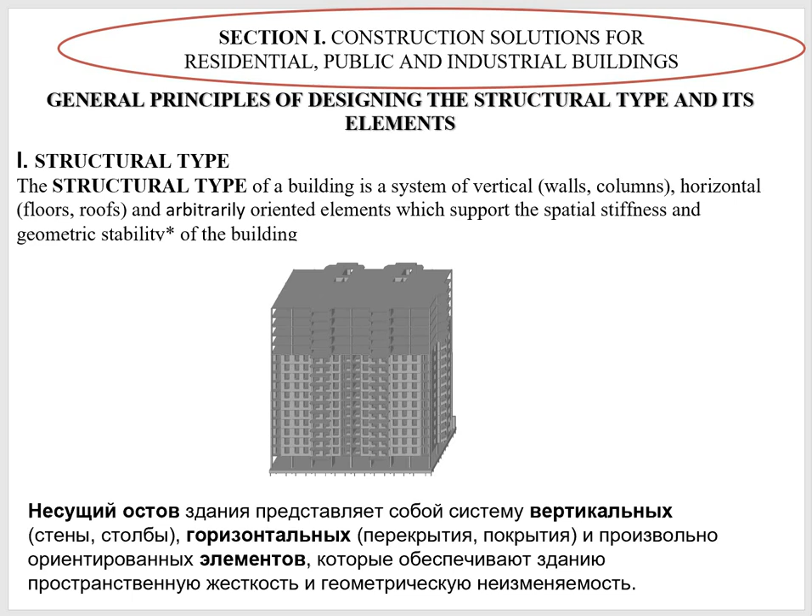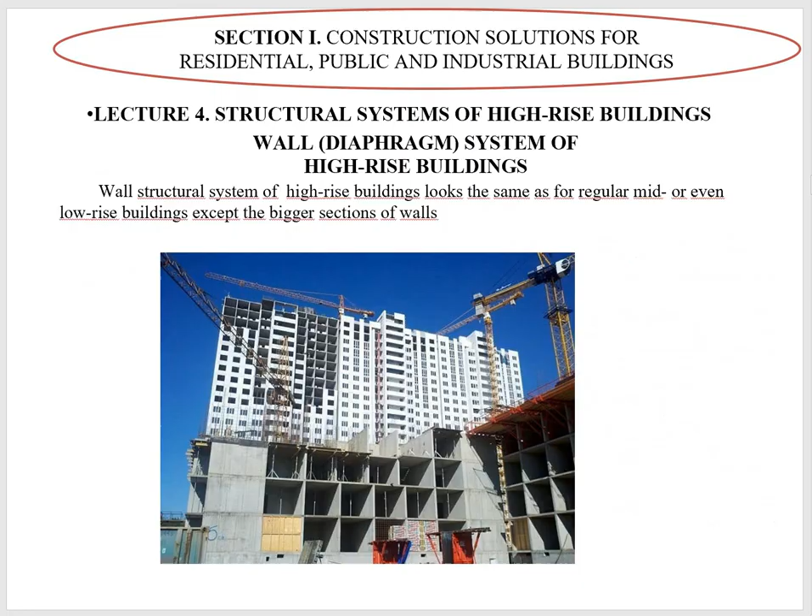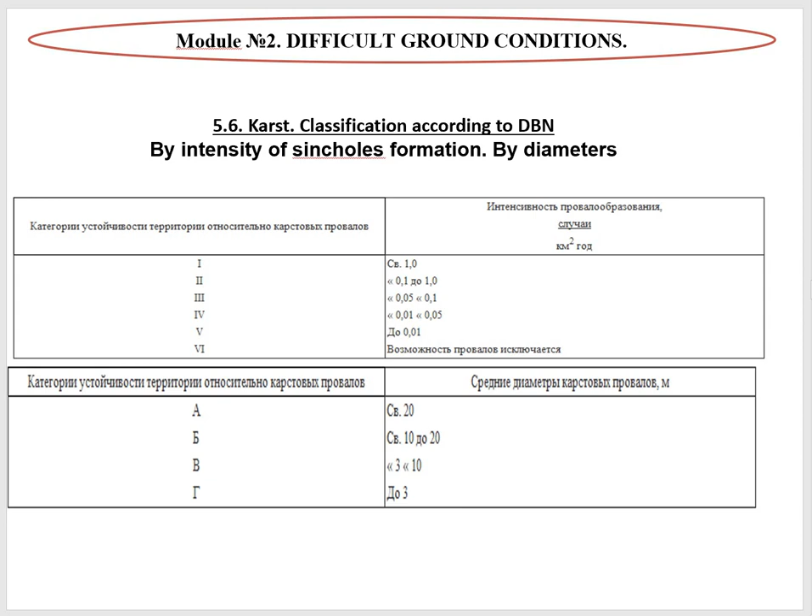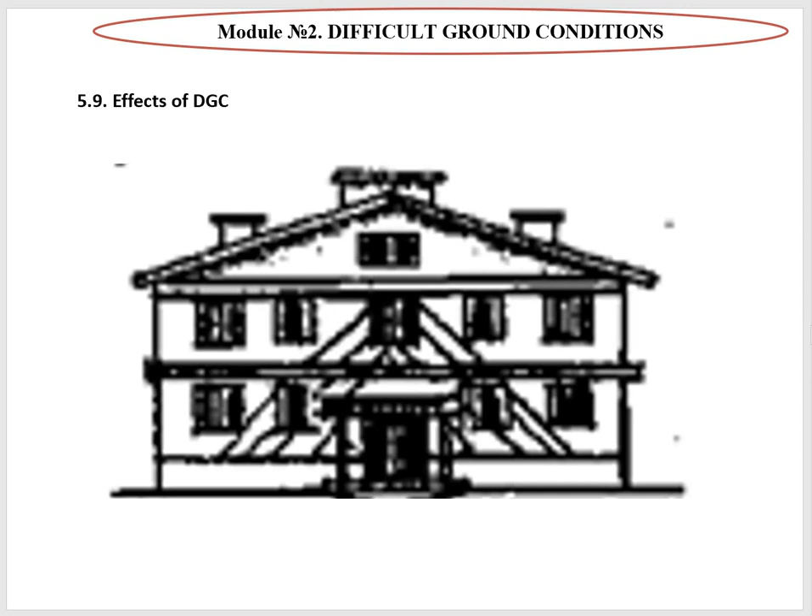We have already considered difficult ground conditions connected with water flooding, surface water flooding, with karst, erosion, abrasion, landslides, and today we will start to talk about sites exposed to seismic impacts.

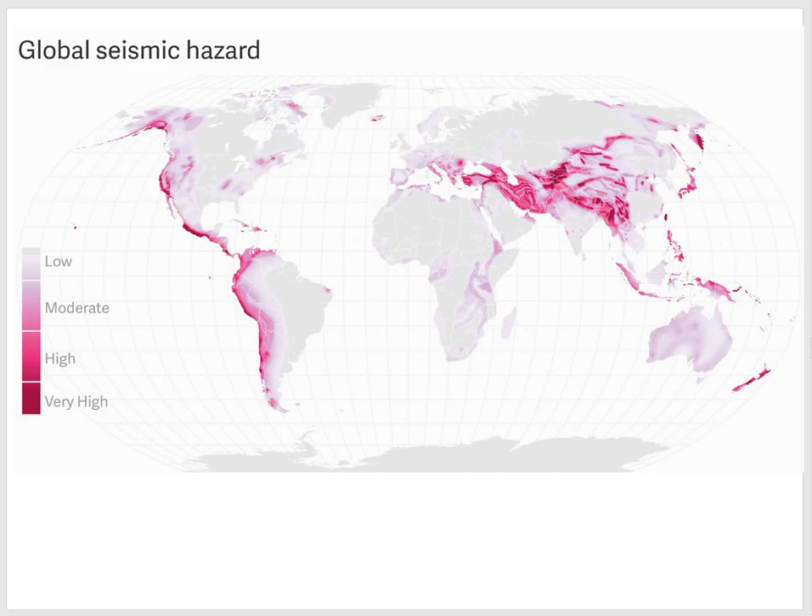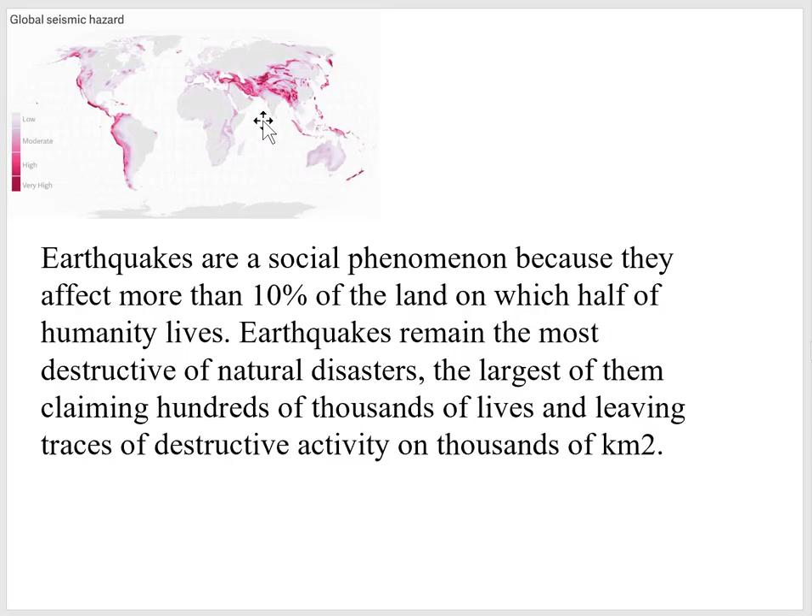This lecture will consist of two parts: seismology and earthquake engineering. First we'll talk about global seismic hazard. It's interesting to know that more than 10% of the Earth's surface is affected by seismic impacts, and half of human beings live on that 10%.

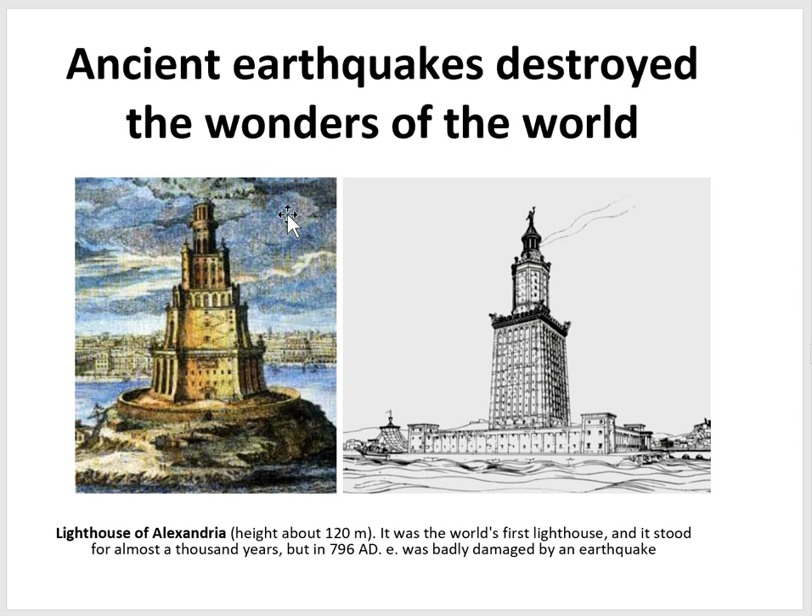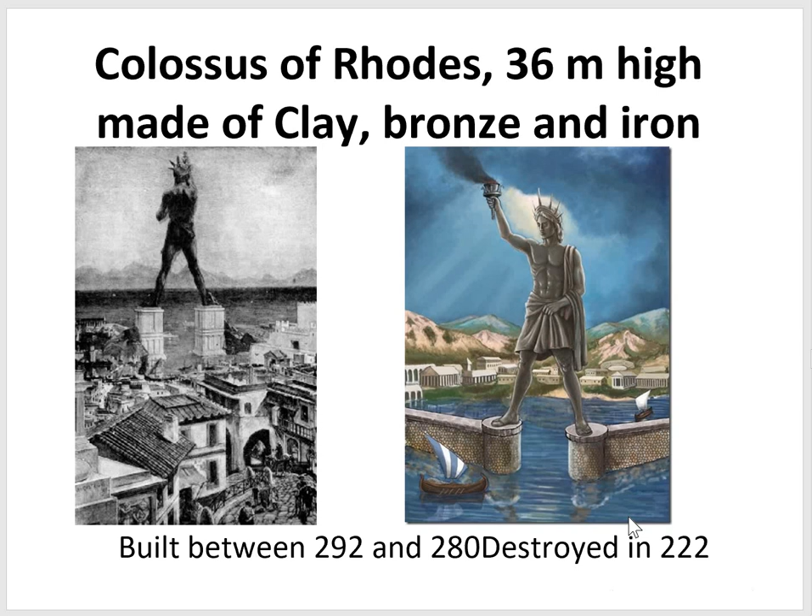If we analyze the history of humans, we find that earthquakes were always near humans, and the wonders of the world show this better than anything else. From the seven wonders of the world, three were destroyed by earthquakes: the lighthouse in Alexandria, the mausoleum in Halicarnassus, and also the Colossus of Rhodes, which were destroyed by earthquake in 222 before Christ.

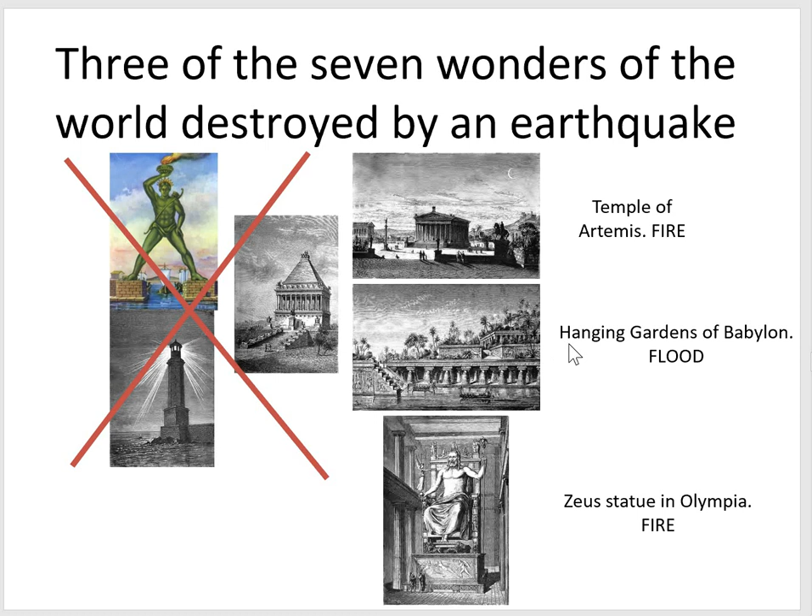The rest of the wonders of the world were destroyed by fires and flood. Only one wonder of the world still stands: the pyramid of Cheops. It was built 2540 before Christ and stands still now because of its unique form, and because of the ratio between the distribution of the mass of the structure and the form of the building, since the form and this distribution of mass are in the best ratio to each other.

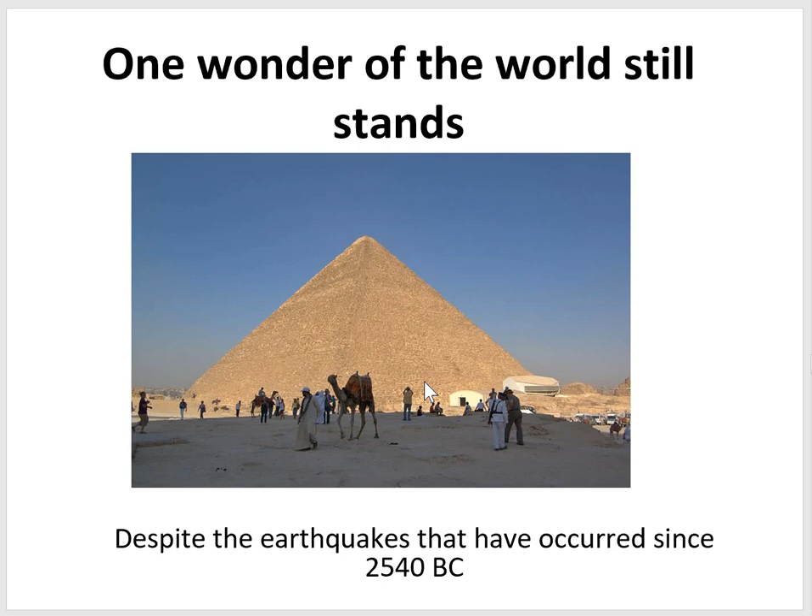We also have to know that our region, Ukraine, is also exposed to earthquakes. We know of more than 30 significant earthquakes on our territory. We don't know much about the ancient earthquakes, but we know very well about the earthquakes which took place in the last hundreds of years, such as the Crimea earthquakes and the Odessa earthquakes in 1802 and 1940.

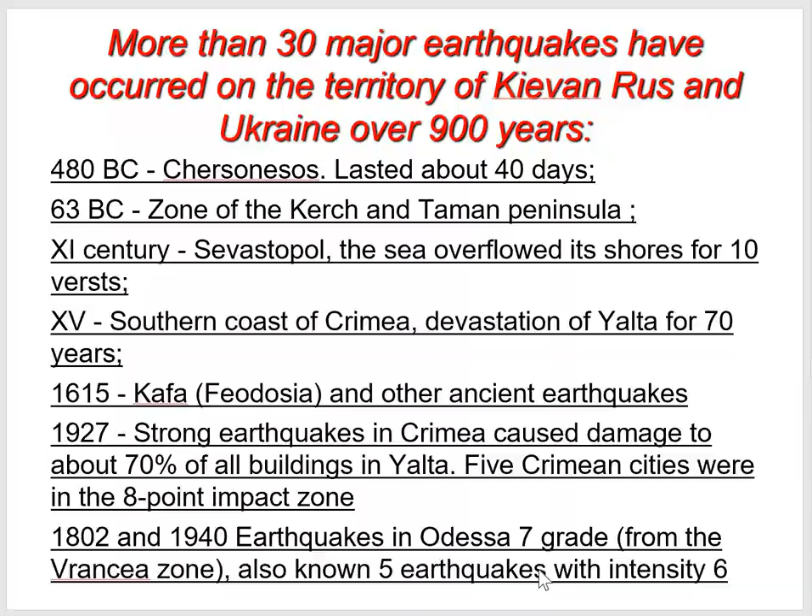The Odessa earthquakes had an intensity of 7 grade, and we also know many of 5 and 6 grade intensity. Here is the diagram of the Odessa earthquakes, and we can see the 7 grade intensity, as well as intensity 6, 5, and 5.5.

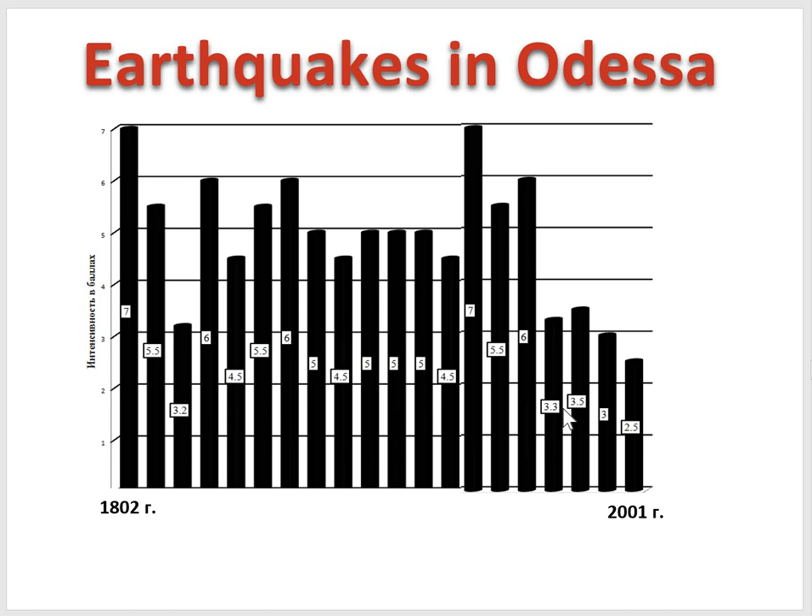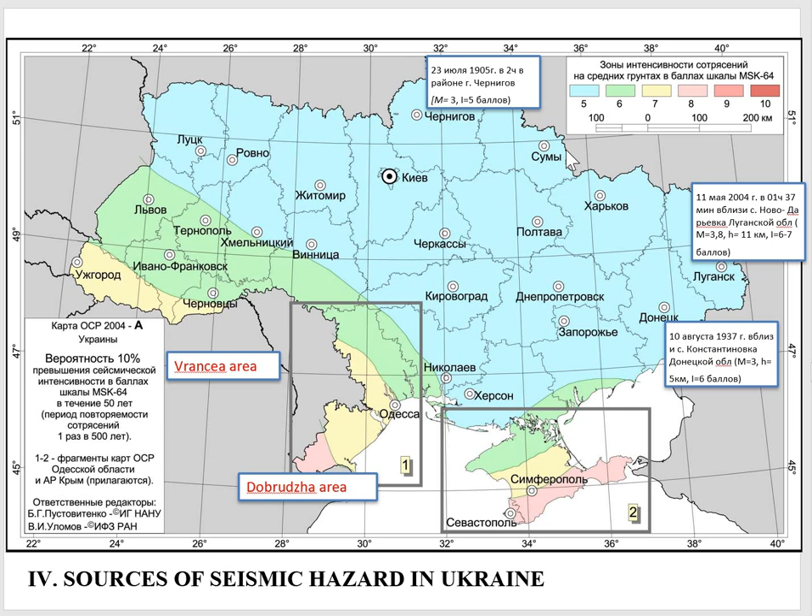We know there are some sources of earthquakes which make the territory of Ukraine, in most part, affected by earthquakes. We know the Vrancea area and Dobrudzha area, both located in Romania. We also know the Crimea earthquakes, Carpathian earthquakes, and platform earthquakes of the territory of the country.

Here we can see the map of peak ground acceleration, and most of them are situated in Romania, but we can also see the Crimea earthquakes and the peaks of these earthquakes.

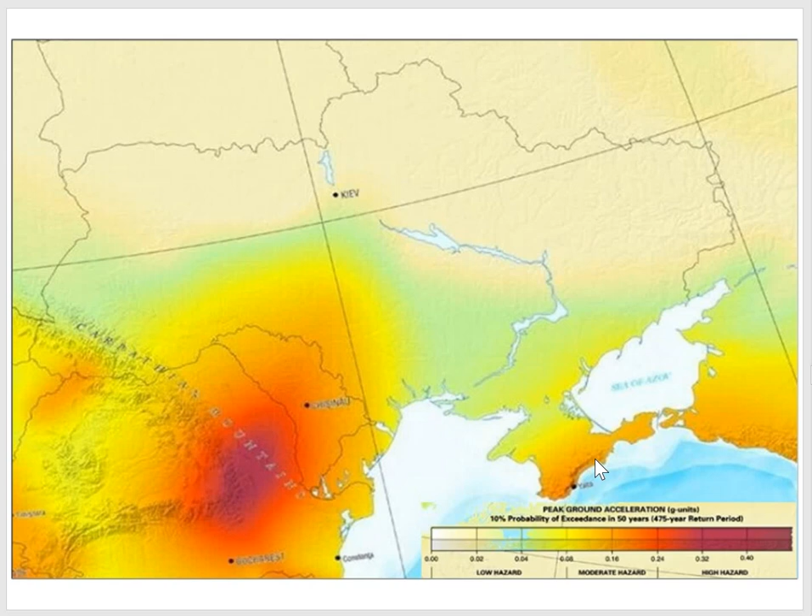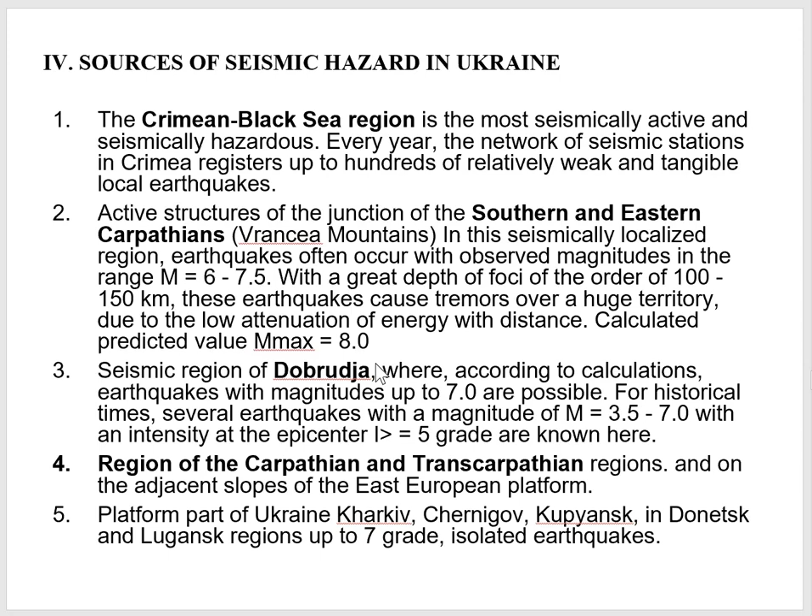Here are the 5 main sources of seismic hazard in Ukraine. We were talking about it previously.

Now it's time for us to analyze the causes of buildings destroyed by earthquakes. Why are they destroyed? It's because of design errors, which are errors formed by designers, architects, and structural engineers. It's construction errors, which occur during the construction of the building. Operating errors, which occur during the exploitation of the building, and errors in regulatory documents. We also know that our building codes have problems and mistakes, and those can lead to the demolition of buildings due to earthquakes.

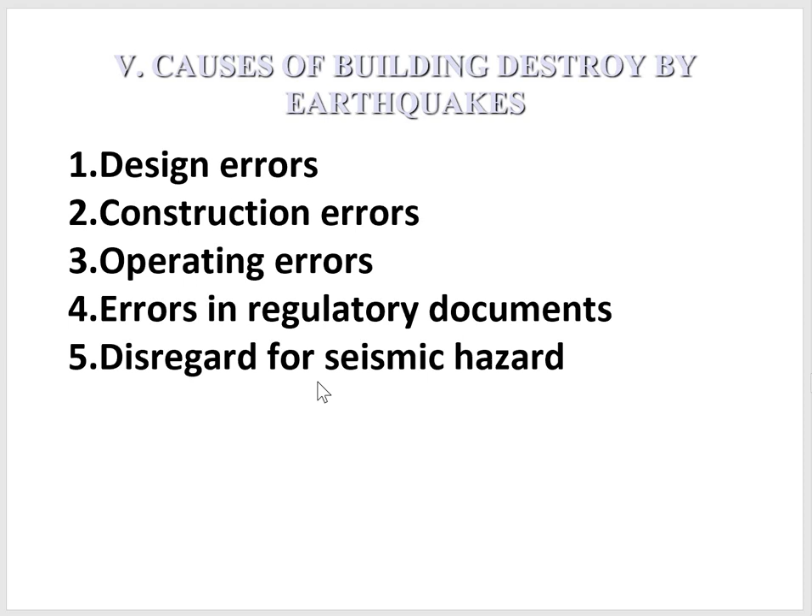Also, disregard for seismic hazard is a very common cause of building destruction, because some people don't want to consider earthquake probability at the construction site.

One can classify causes of earthquakes. Mostly it's tectonic, a joint behavior of various platforms and seismic plates, but also volcanic, landslide earthquakes, and technogenic earthquakes.

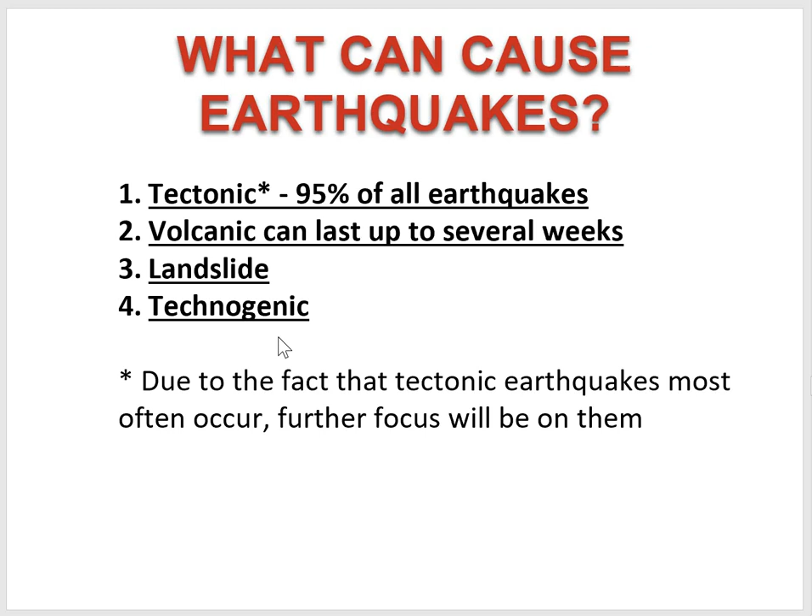We have to consider the most dangerous source of seismic hazard, which is connected with tectonics. To analyze the tectonics, we have to analyze the structure of the Earth, our planet. It looks like a layered cake with a hardened outer layer and softer liquid interior layers, called the core, inner core, outer core, bottom mantle, top mantle, and also various surfaces between such layers.

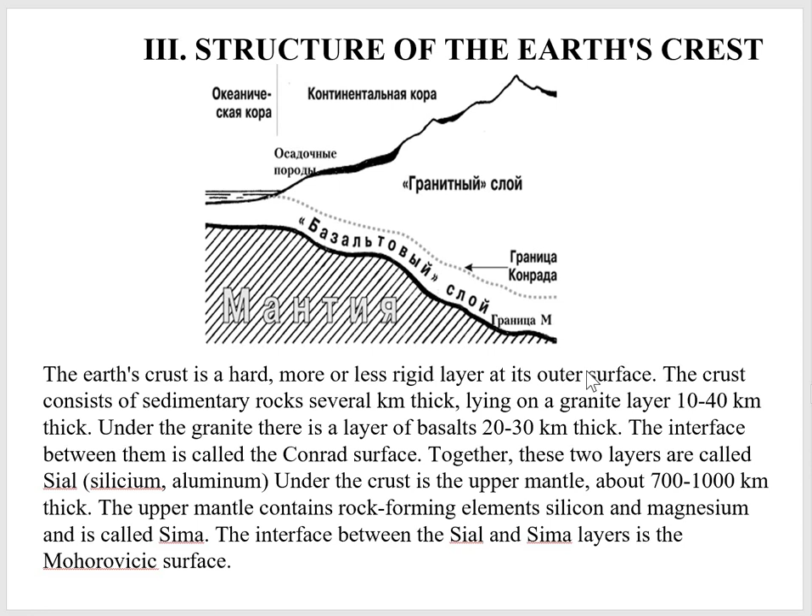Here is the picture of our Earth's crust, and it looks like this. It's also lying on the outer mantle or top mantle, and these parts of the Earth's crust move in various directions, which leads to accumulation of seismic energy and its redistribution due to earthquakes, when a really big amount of energy is collected in the cracks of the Earth's crust.

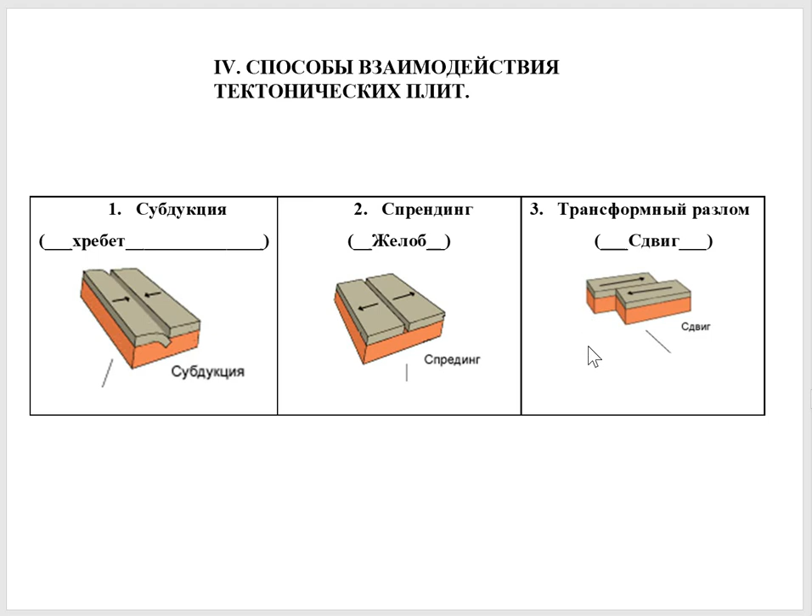Here we can see the methods of interaction of tectonic plates: subduction, spreading, and shift.

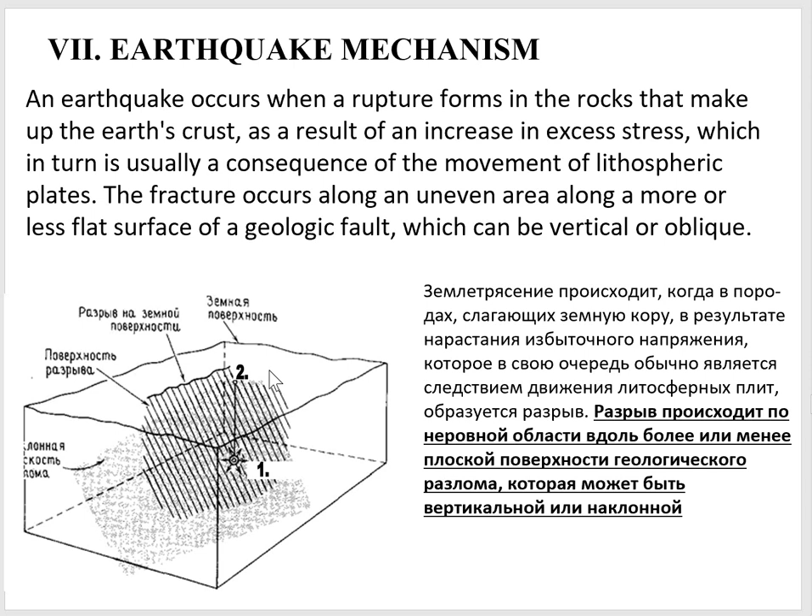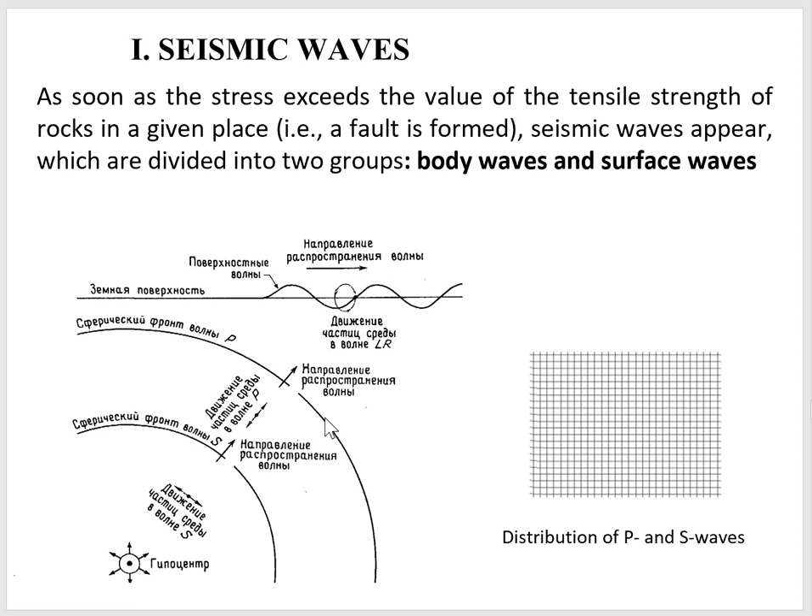During the earthquake, we deal with 4 waves, which can be divided into main groups. Here we can see the situation which shows us 2 main waves, the P wave and S wave. The S wave is the secondary wave, and we can see it right here. And here we can see the primary wave. It looks like this, and secondary waves move in this direction. We have to know that the P wave is the fastest wave, because P is from primary, первичная, and S is a slower seismic wave, and it's called the S wave because it is secondary.

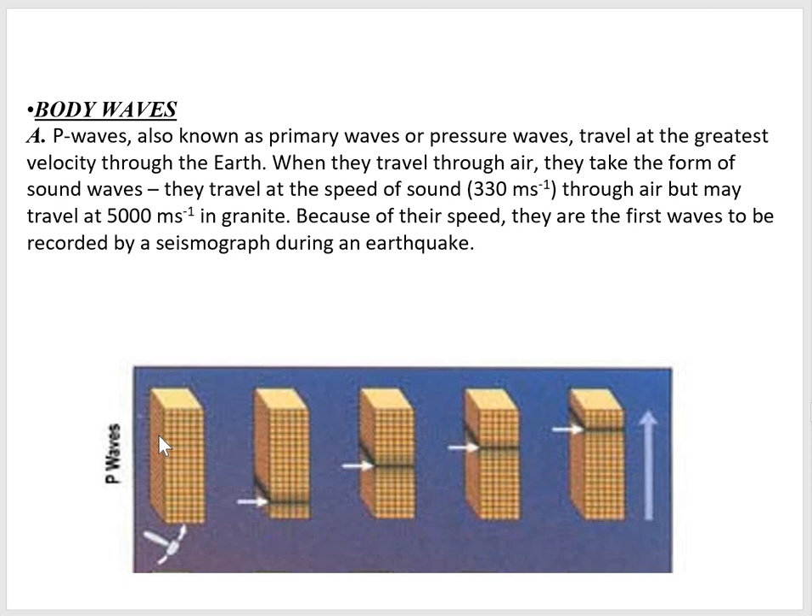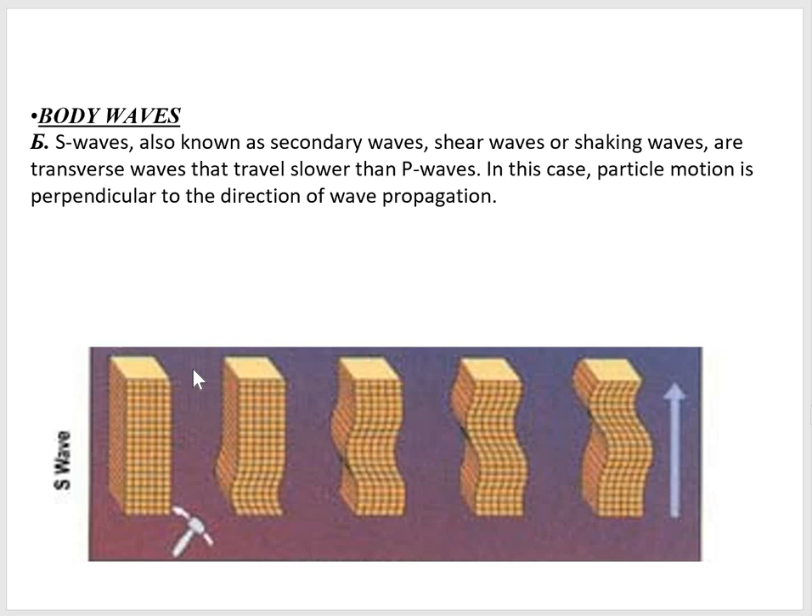And here we can see the transmission of waves in simple prisms. It is the motion of the prism from the impact of the hammer, and it shows us the movement of the particles according to the P wave. When we look at the S wave, it is the lateral impact on our prism, and it also shows us the movement of the wave through this prism.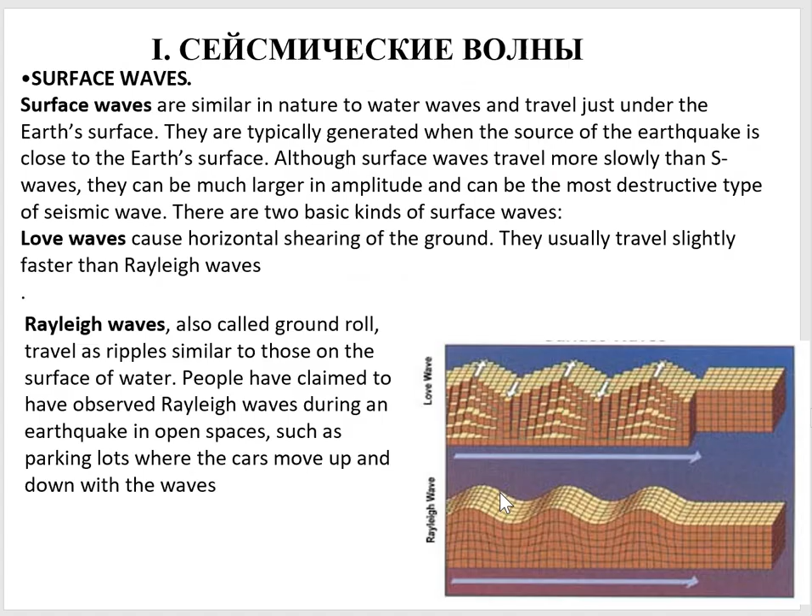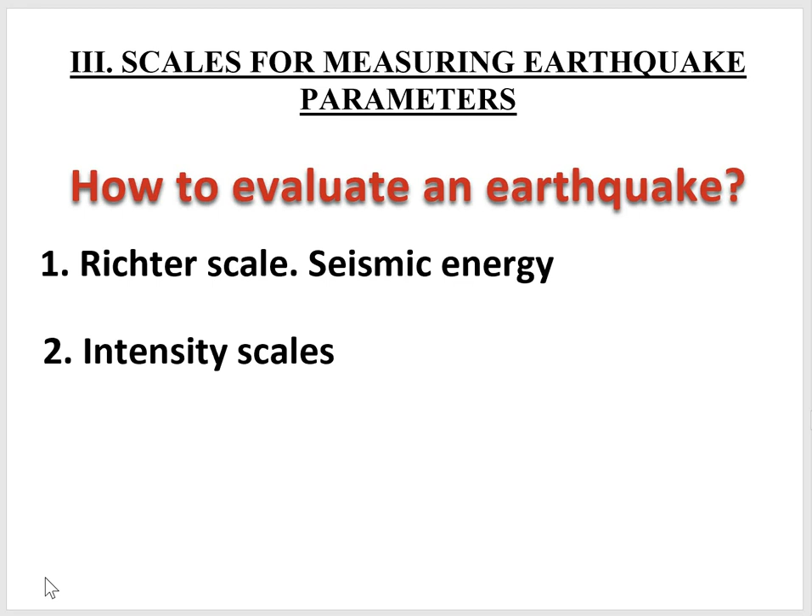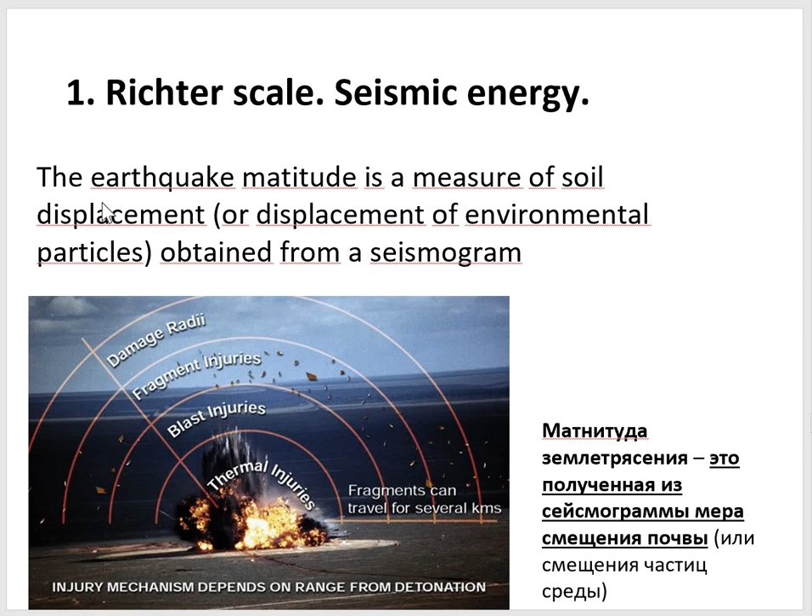The next question that we have to discuss today is how to evaluate the earthquake. It is a very important topic because we have some dimensions for our bodies, like weight and height, but earthquakes can be evaluated in 2 main ways: by the Richter scale and the intensity scale. The Richter scale shows us the energy of the earthquake as if it were a blast or explosion, and it shows us the TNT equivalent of the earthquake, like C4 or other explosive material. An earthquake can also be evaluated in the Trotyl equivalent of the blast.

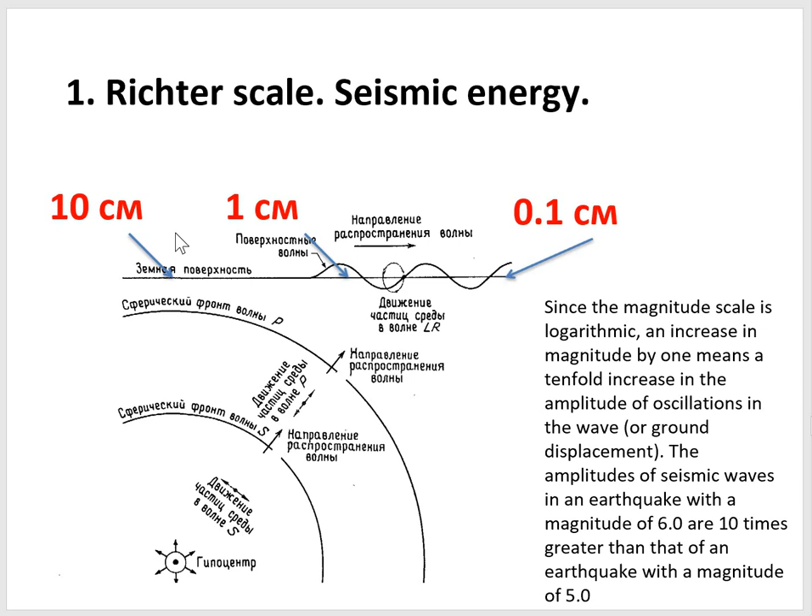Next, how can it be measured? It's measured as the ratio of two important values. First is the displacement of the Earth's surface, and the ratio of this displacement to the distance to the hypocenter gives us the magnitude. The Richter scale is measured in magnitude. So length is measured in meters and centimeters, also in feet, but when we talk about the Richter scale, it is measured in magnitudes.

Also, we have another group of scales. They are called intensity scales, and intensity is the visual assessment of the result of the earthquake. So according to the amount of destroyed constructions, cracks, etc., we can make a conclusion about the grades according to the intensity scale. So the intensity scale is an absolutely visual and subjective scale, which is measured according to the visual assessment of the consequences of the earthquakes.

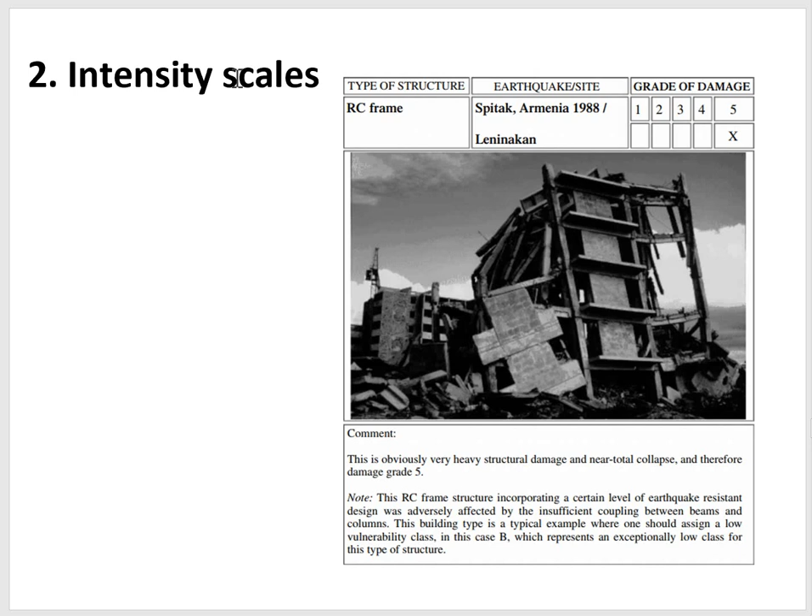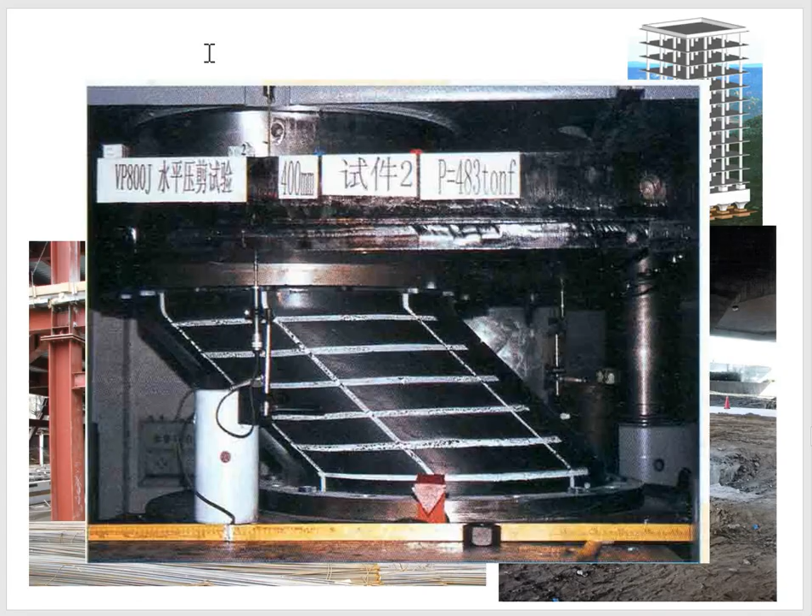Main definitions of the intensity scale are according to our Ukrainian DBN. We have our own scale, but it's very similar to the European macroseismic scale. And we have a ratio between those two scales that we were talking about previously, because each earthquake has only one magnitude, but it has a very large number of intensities. Why is that so? When we talk about magnitude, it is the displacement of the surface compared with the distance from the hypocenter.

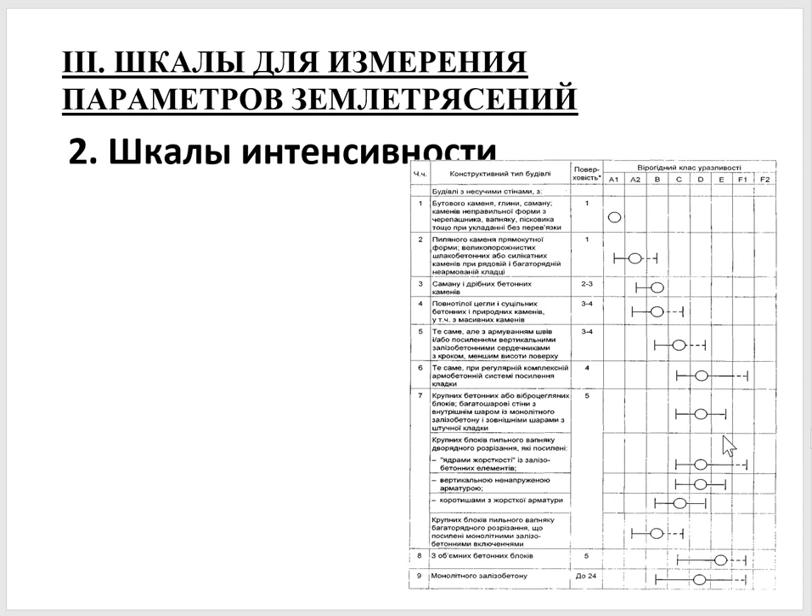But when we talk about intensity, it is the destruction of the structure. So when we deal with an earthquake, here we can see the magnitude, and although we are assessing the displacement from this or that place, it can be expressed in one value called magnitude. But for one magnitude we had in this case 12 intensities, because the closer it is situated to the hypocenter, the bigger the destruction will be.

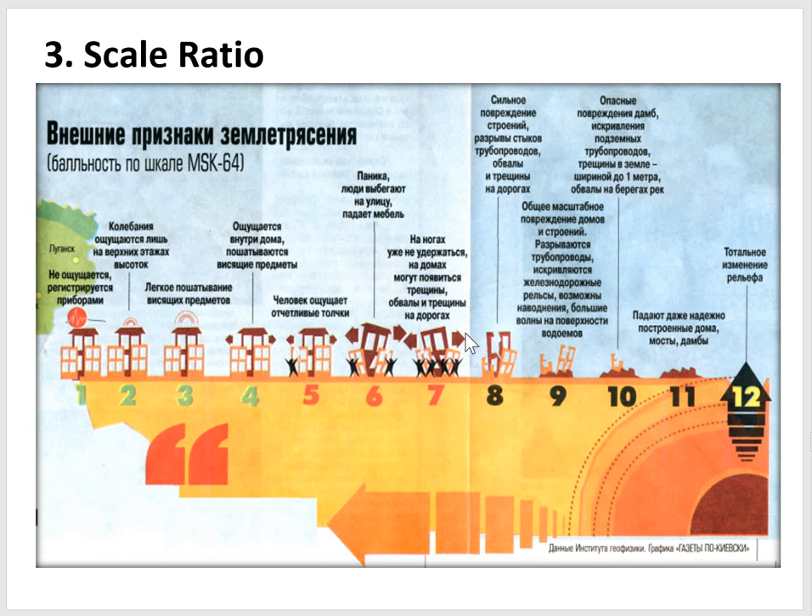But when our building is located very far from the hypocenter, the destruction will be significantly less compared to the building which is situated in the hypocenter, at the epicenter of the earthquake.

So, what do we have to do with earthquakes to reduce the losses due to the earthquakes? First of all, it's preparatory work with the people. So we have to prepare people for the earthquake, so they know what to do when the earthquake starts. Next way is to predict the earthquakes, but as we know, for today it's impossible to predict the earthquake and its localization.

We can make the forecast, but we absolutely have no chance to predict the earthquake and say with 100% probability that the earthquake will be tomorrow or in 100 years. We can tell about the probability of earthquake, but it cannot be measured as a 100% probability.

And also we have our architectural, structural approach to reduce the losses due to the earthquakes. It's earthquake resistant construction and designing. So it is one of the most effective ways to reduce losses, but also it is the most expensive way to reduce the amount of losses due to earthquakes.

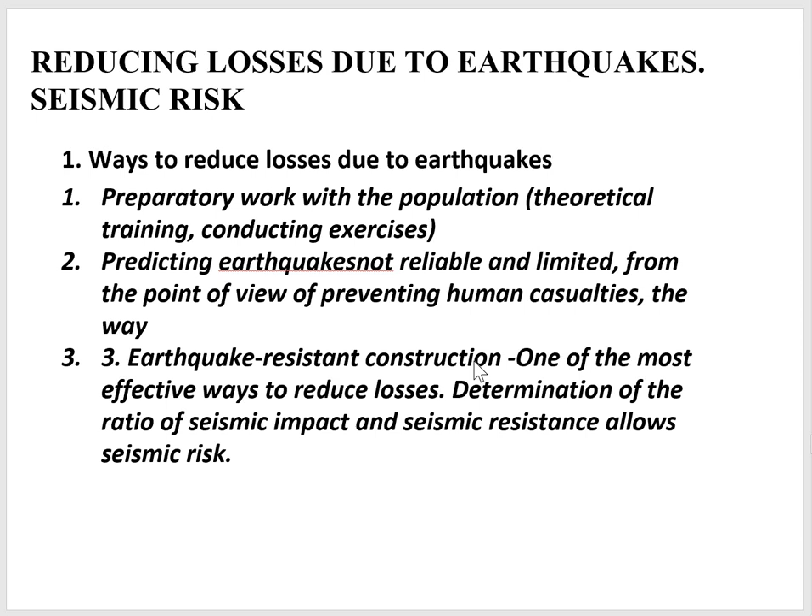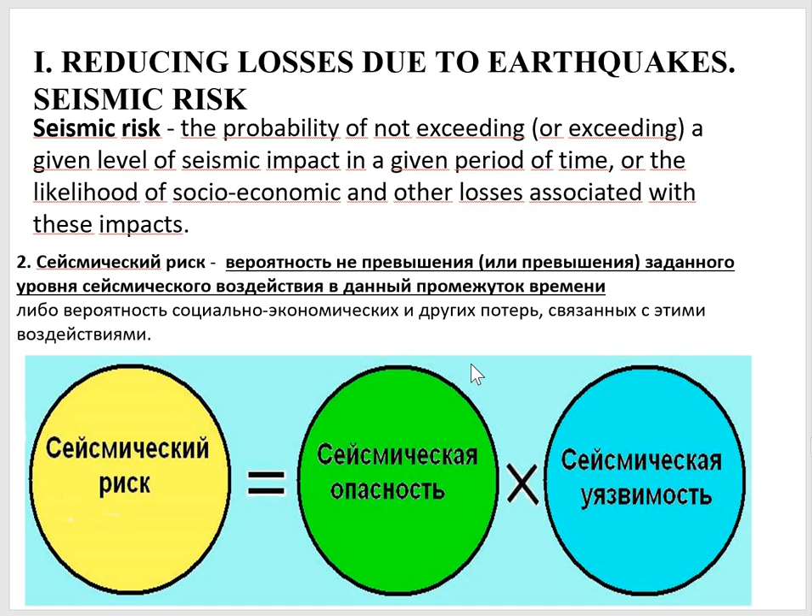Now we're talking about the seismic risk. It is the probability of not exceeding, or the opposite, exceeding a given level of seismic impact in a given period of time, or the likelihood of socioeconomic and other losses associated with the impacts.

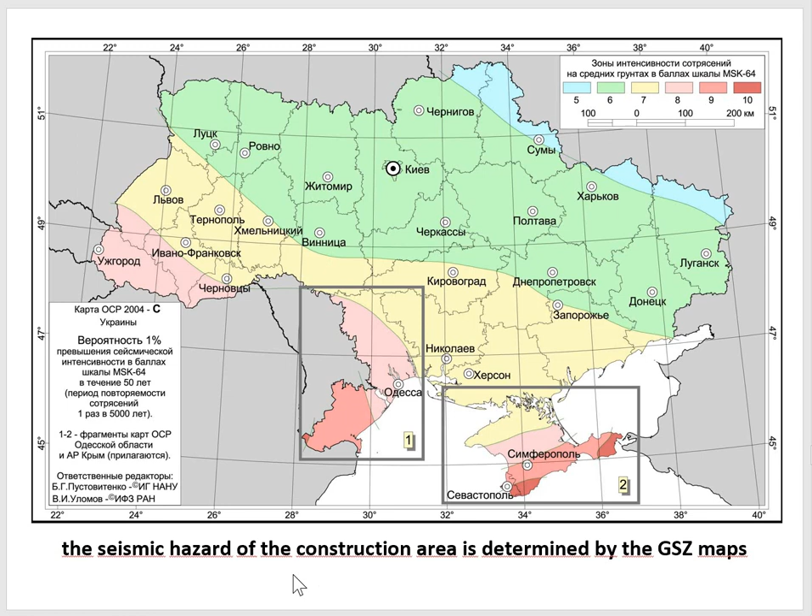So according to those we have 3 maps: A, B, C map, and according to one map we have the intensity of the earthquakes 7, but according to map C it is 8 grade. So with the growth of the maps from A to C, we have the significant growth of the intensity, which we have to understand when we design structural elements for buildings in those regions.

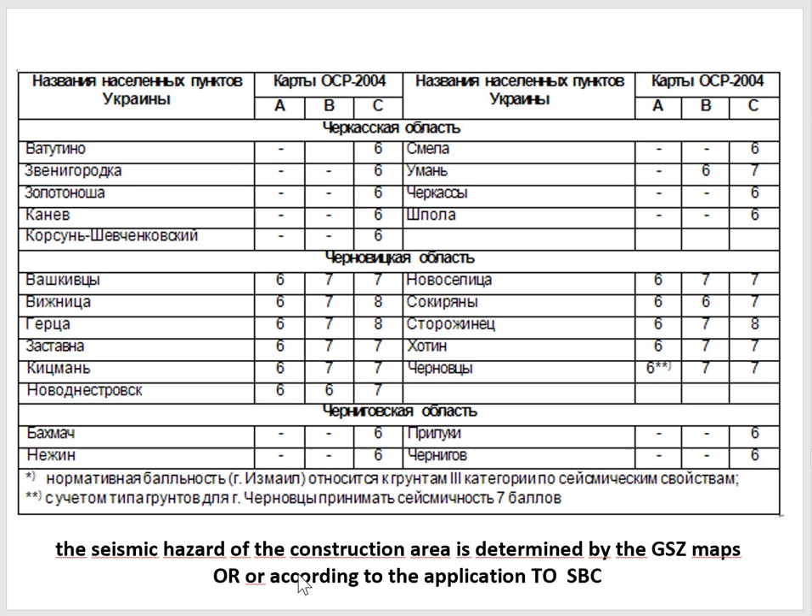So also in the Ukrainian code called DBN, we have such a map which gives us an ability to define which town can be exposed to an earthquake of a certain intensity.

Also, we have the very important impact of the ground, because soils at our structural site can decrease the impact of the earthquake on our building because of their strength. So we have maps for all of Ukraine, and there all the regions are exposed to the intensity which was defined for soils of the second category.

But if we have on our structural site soils of the first category, then we have to reduce the seismic impact. And from the opposite point of view, when we have soils at our structural site from the third category, then we have to multiply the seismic impact to take it bigger, because those soils can increase the impact of an earthquake because of their structure.

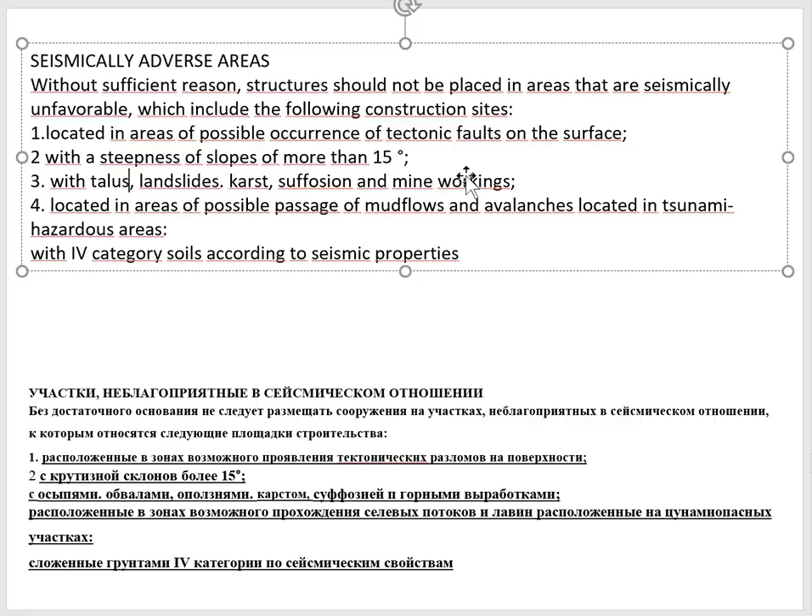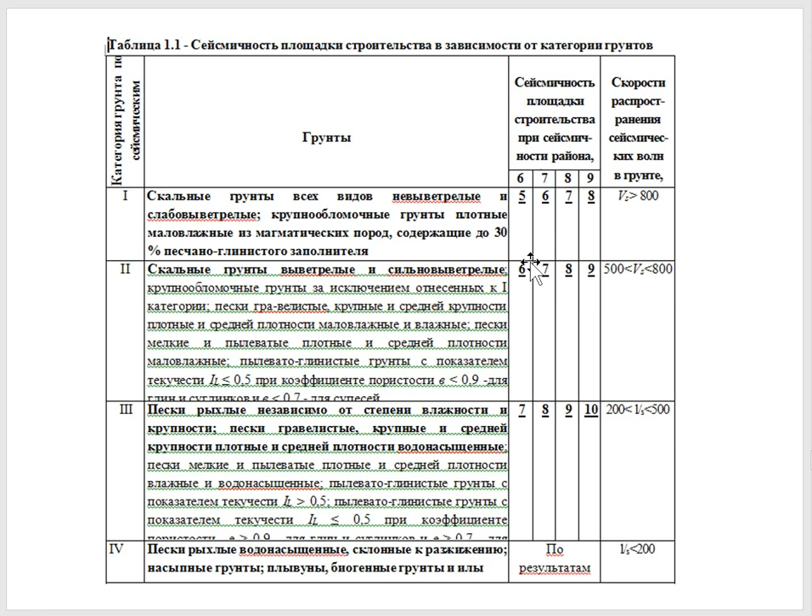And the fourth category of soils: according to the soil seismic properties, as we were talking about previously, the first category is the best category, because it gives a reduction of the seismic impacts, and the third category of soils can, on the opposite side, increase the impacts of the earthquakes and add an extra grade. Say, according to map A, we have 7 grade; then if on this construction site we have soils of the third category, we have to add one more grade and calculate the building on intensity 8. And the fourth category of ground is the worst.

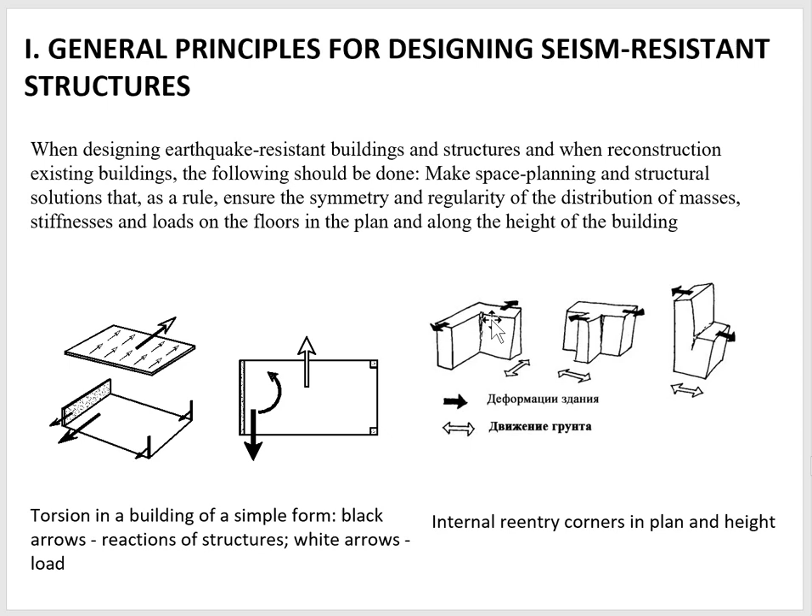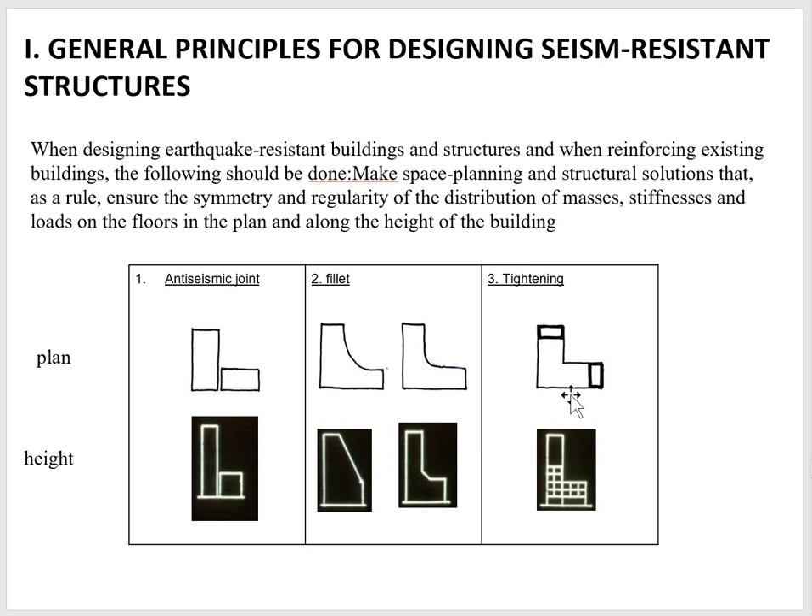With the wall which is situated asymmetrically, it gives us an additional torsional moment which can destroy our building. Also, we have to be careful with the inner corners of the building, because during earthquakes they can absolutely destroy the building. That is why we have some solutions for cases when we deal with such inner corners. First, and the simplest one, is to subdivide the building into parts, and this lets us avoid cracks in the facade walls during possible earthquakes. Also, such a solution makes the behavior of such structures much better.

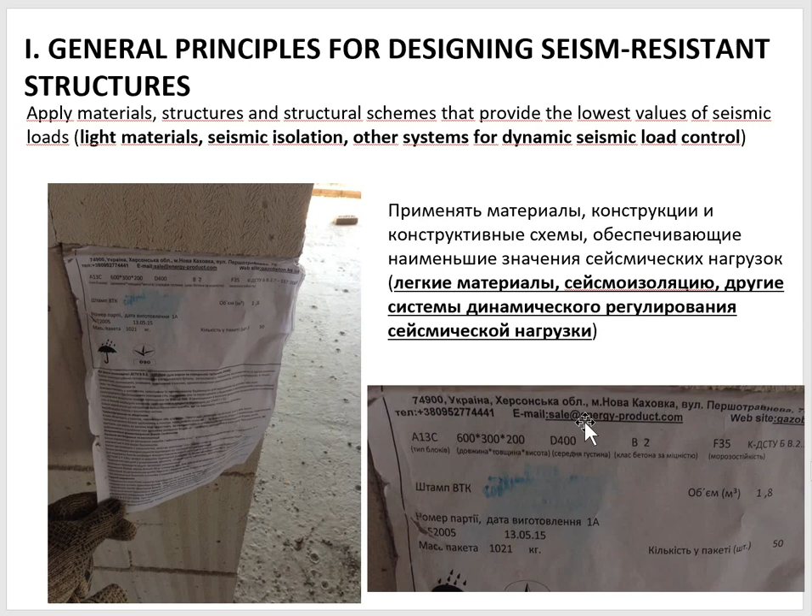Also, we have to understand that when we talk about seismic impact, it is the combination of two main parameters: the mass of the structure and peak ground acceleration. We can do nothing about the second, the ground acceleration, but the first parameter of the seismic force, mass, is absolutely in our hands, and if we take lighter structural elements, it lets us reduce the seismic impact, because as weight decreases, so does the seismic impact on the structure.

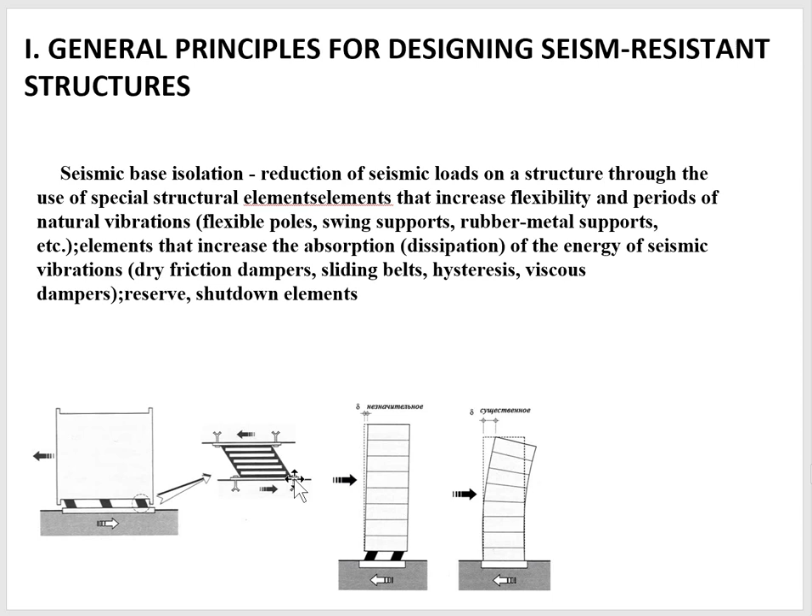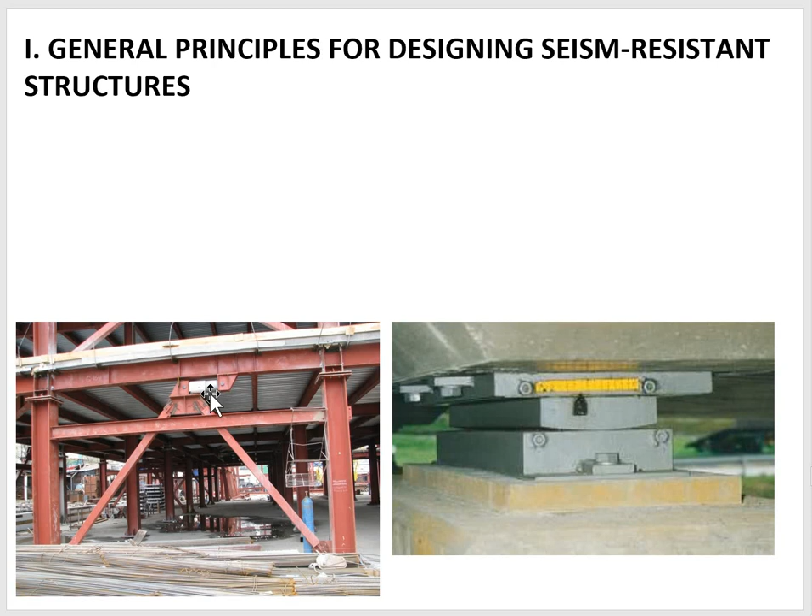So we also have various solutions such as seismic base isolation, which gives us an opportunity to reduce the impact on the building by using rubber-metallic plates, or solutions which decrease the impact of the earthquake on the building through elements which allow it to move in this way.

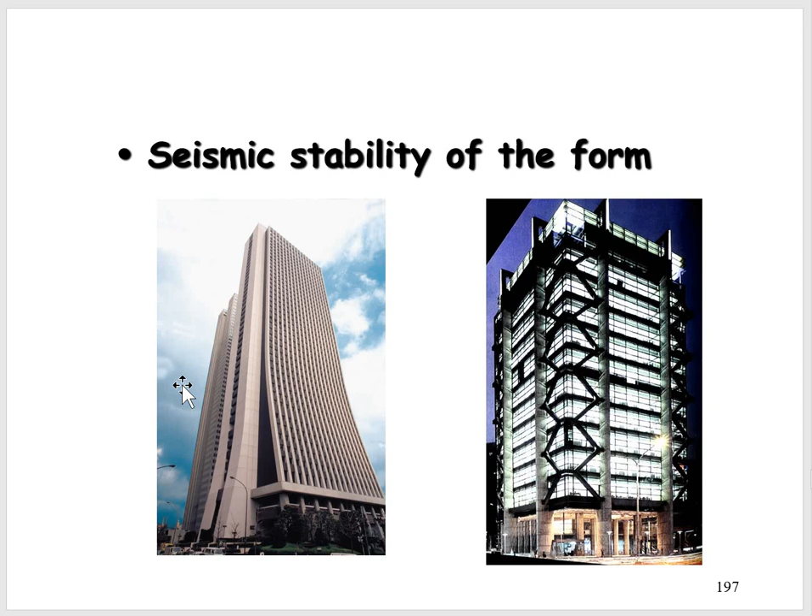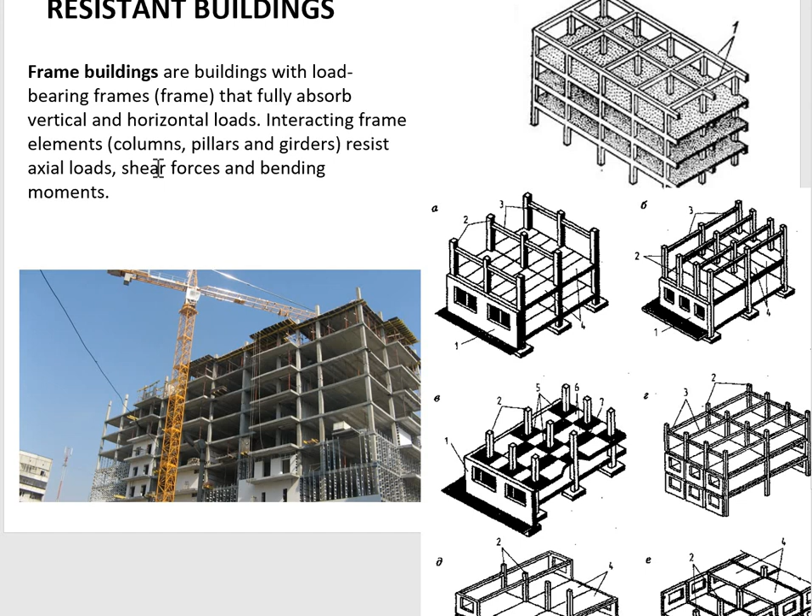Also, when we talk about seismic resistance of structures, first of all, seismic resistance is oriented on the architect and connected with the form of the building. And we have to analyze the various structural schemes of buildings which are used in earthquake hazardous regions. First of all, frame buildings and various variants of frame buildings are very good under earthquakes.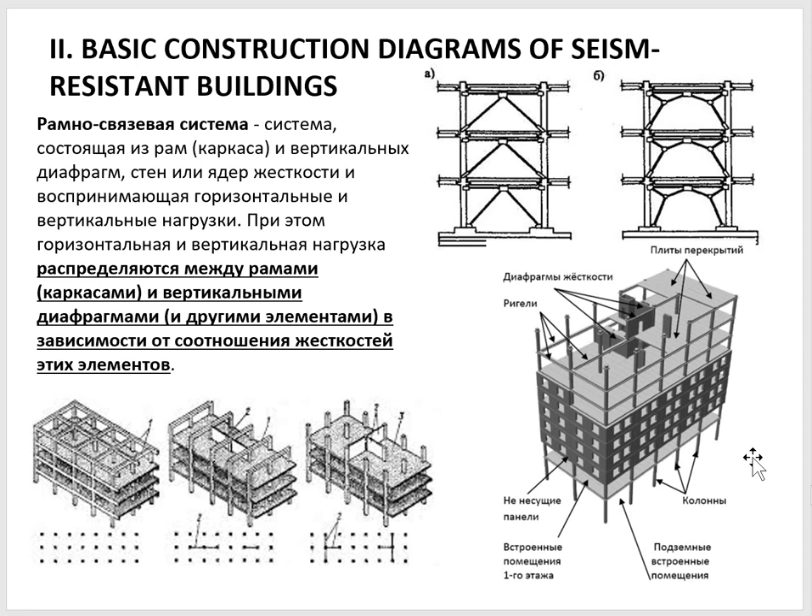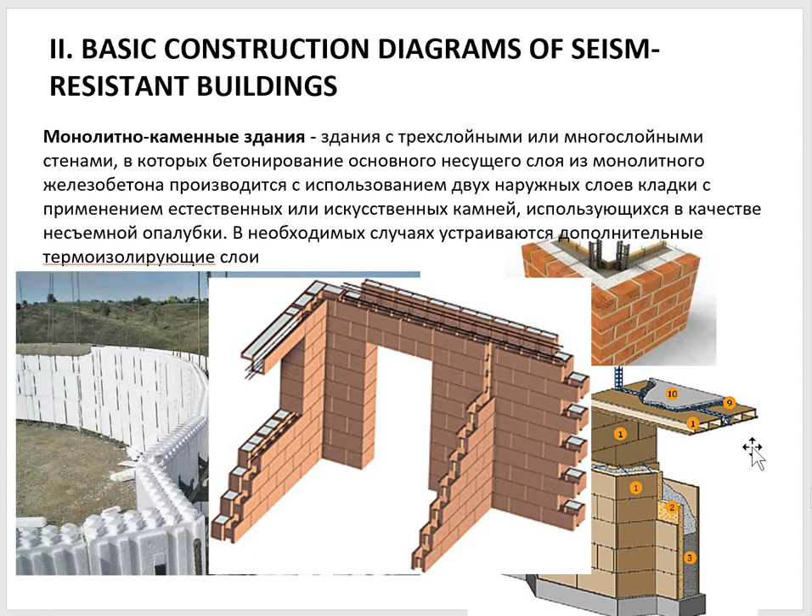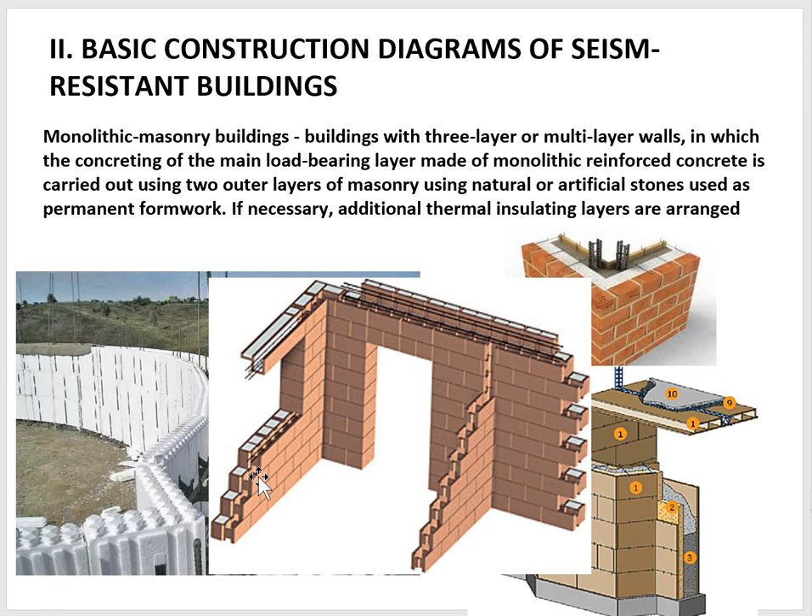Also, we have monolithic buildings with layered walls, with 2, 3 or even more layers. Here they are. The walls serve as the formwork for the future reinforced concrete.

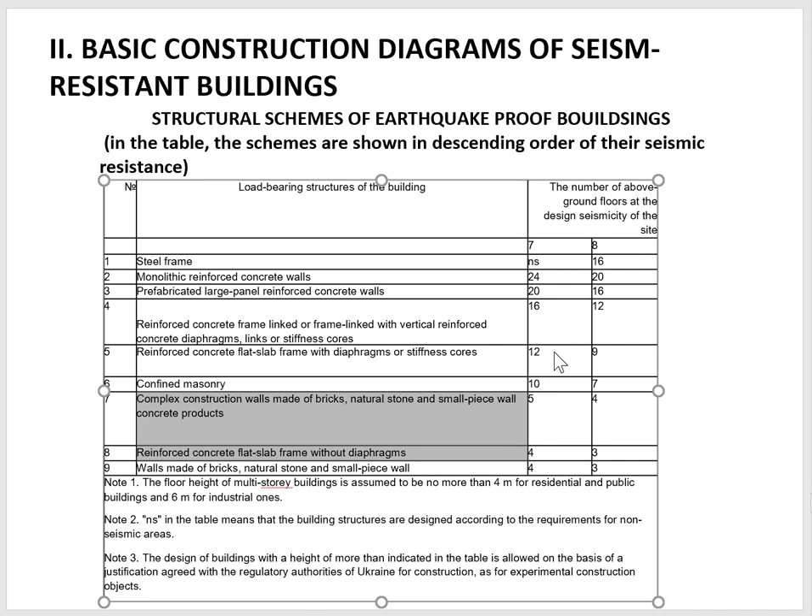And here we can see all those structural schemes that we discussed previously. We can see the list of those buildings in order of decreasing seismic resistance. The biggest seismic resistance is the building with the steel frame, and it lets us design them as for non-seismic regions. And here we can see the reduction of the limited number of floors. All of this is connected with the behavior of the structural scheme under earthquake.

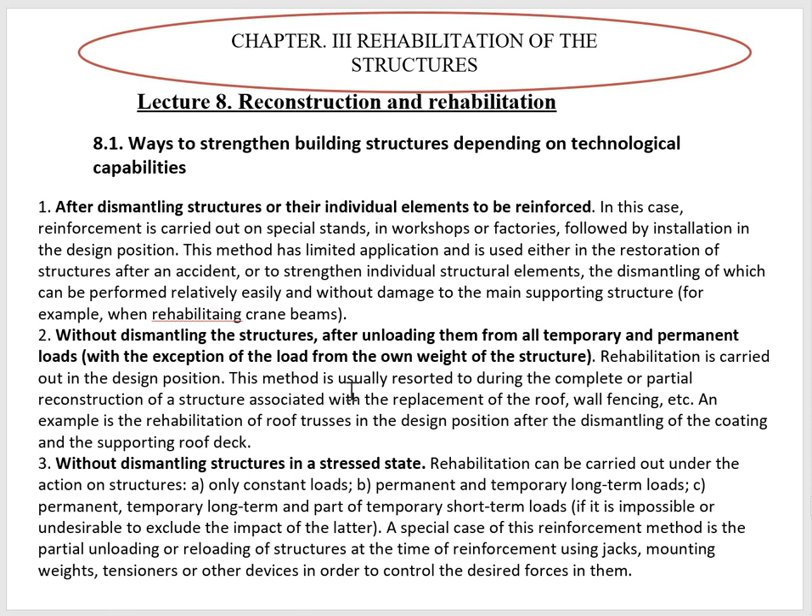The next topic that we will have to discuss is reconstruction and rehabilitation, but we'll talk about this later.